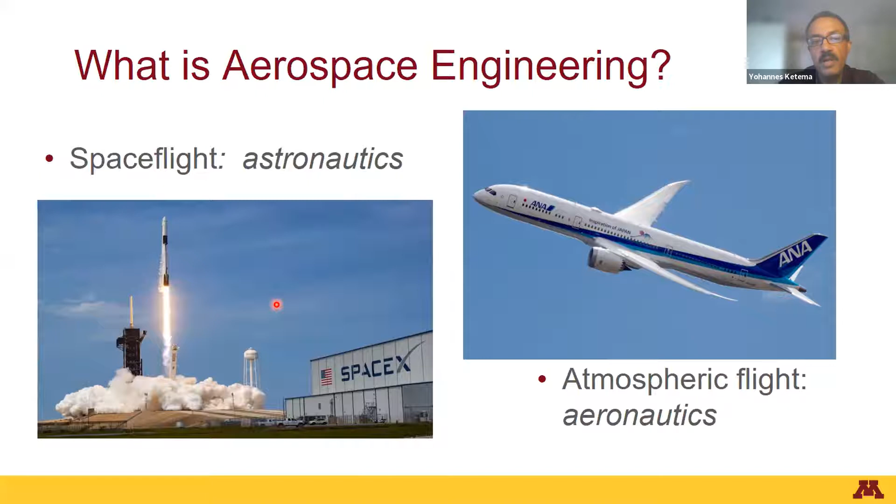In order to be able to work in this area, there are 3 major topics or sets of courses that you would take within the major. I'll talk a bit more about each of these. First we have fluid mechanics or aerodynamics, which is about the flow of fluids around bodies. Then there's structures and materials, because you need to learn about what materials to use in building your airplane or spacecraft. And then there's system dynamics, which is generally about how to control the motion of bodies, possibly airplanes or spacecraft again.

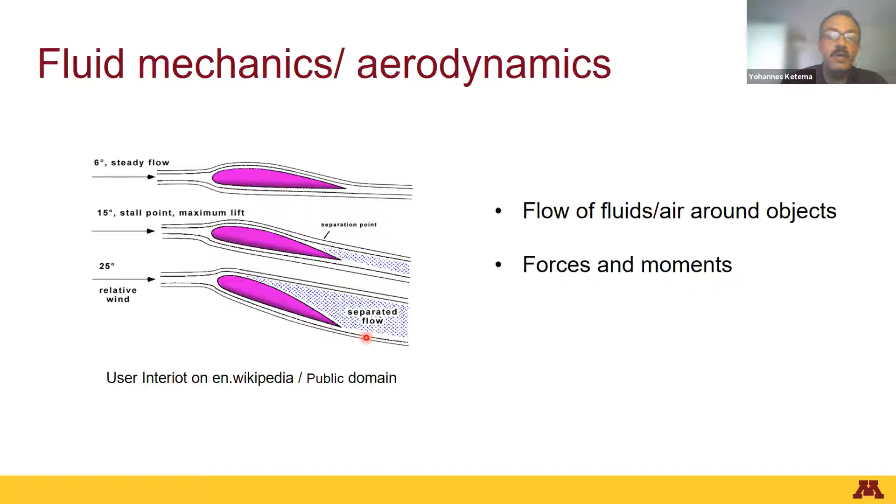Talking about fluid mechanics, aerodynamics is a part or a special case of fluid mechanics. It's about understanding the effect of the flow of air around bodies, typically your airplane, and what types of forces are generated when the air is flowing around the body, or in real life, when the airplane is flowing or moving through the air.

As you may have already seen, the flow of air around a specially shaped body called an airfoil, which is typically the cross-section of an airplane wing, will generate several forces. There's a lift force that is lifting the airplane up. There's drag, which is resisting the motion of the airplane. And there's a moment that tends to turn the body in the counterclockwise direction, the way we're looking at it. It's important to understand all of these, and this is the main goal in studying fluid mechanics and aerodynamics in the context of aerospace engineering.

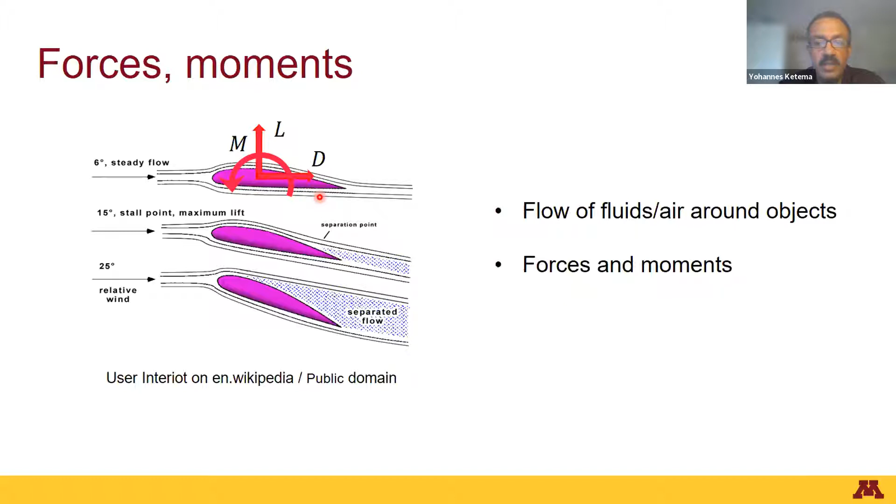There are also other extensions of aerodynamics, such as propulsion, where in addition to just the flow of air, there's also other things going on, such as combustion of the fuel in the air, and the exhaust flowing through the jet engine, or out of the jet engine, is what causes the force on the airplane in the other direction.

So this would be a jet engine, but of course there are many other types of engines, including rocket engines, that are all important as a means of creating propulsion, which we'll also be studying.

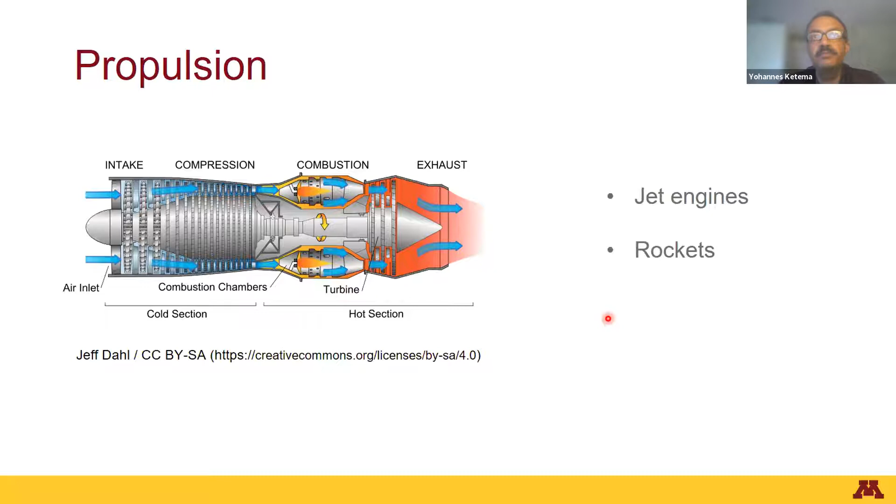The next area that I mentioned is aerospace structures. This is about the materials that we use, but also how to put them together into structures that have the characteristics that we want, for example the right stiffness, or vibrational characteristics, and so on. This is generally called structural analysis, and there's a lot of software used to analyze these types of structures.

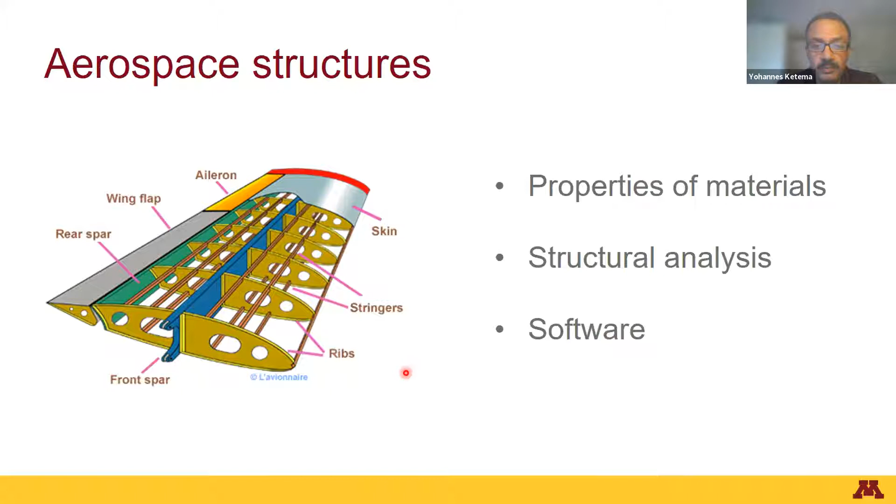Lastly, we have system dynamics generally, but in particular flight dynamics and control when we're talking about atmospheric flight. As you know, the way airplanes are controlled, or the way the motions of airplanes are controlled, is through the use of what are called the control surfaces. So for example, we have the rudder, there's what's called the elevator, and these are control surfaces that can be deflected to cause the right amount of moments that we need to turn the airplane in the right direction.

So a high level view of how all of that might work might look something like this: we have a pilot, say, sending a command to a flight computer, and then the flight computer sending a command to what is called an actuator, a type of motor that is attached to a control surface that is able to deflect that control surface. Because of that deflection, the airplane will move in a certain way, maybe turn in a certain way, and that is picked up by sensors that tell the flight computer how things are going in terms of doing that maneuver. The order that was sent may be adjusted to either continue along that same line or to reduce the deflection and so on.

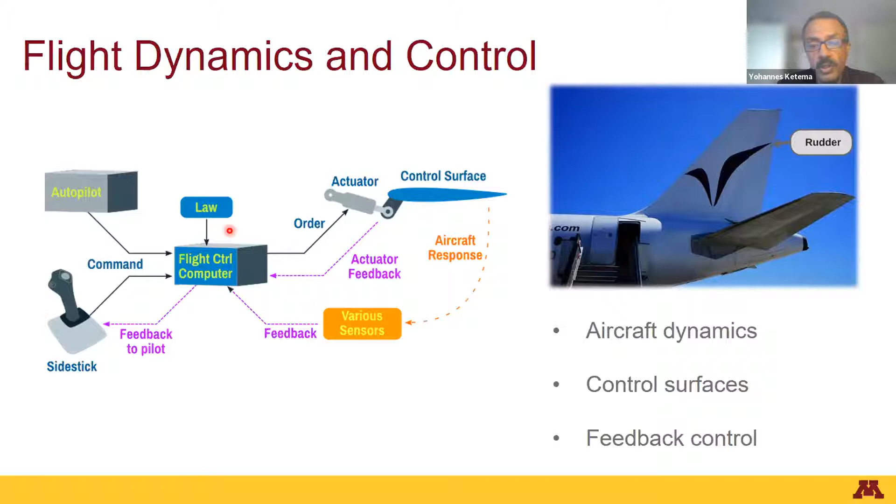Another area that is also related to system dynamics, which is an application of the general area of dynamics, is what is called orbital dynamics. This is very much related to space flight, because when you send a spacecraft into space, there are certain equations of motion, let's say, that need to be satisfied. This is basically based on the types of forces that are acting on the spacecraft. The only force, in addition to the propulsive force that is acting, is the force of gravity. And that leads to certain special types of motion, which you study in orbital mechanics.

So what we're seeing here is, first of all, this blue curve is the orbit of Earth, and the red one here is the orbit of Mars. Here we have these two orbits that are orbits of two asteroids, and the green orbit is a comet. In 2004, there was this mission called Rosetta, where a spacecraft was to go out and meet up with this comet, which is happening right there. This magenta orbit or trajectory shows what the trajectory was that the spacecraft followed to get to the comet.

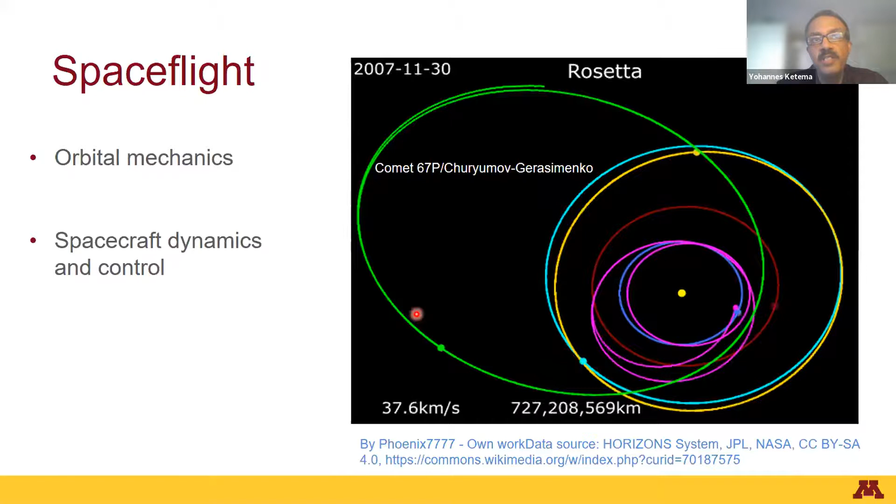So those were some of the areas of courses that you take in aerospace engineering. But maybe a good way of getting a sense of what you will be able to do by the time you graduate as a senior would be to take a look at the aerospace vehicle design course that we have. It's called AEM 4331, and students take this course in the fall of their senior year.

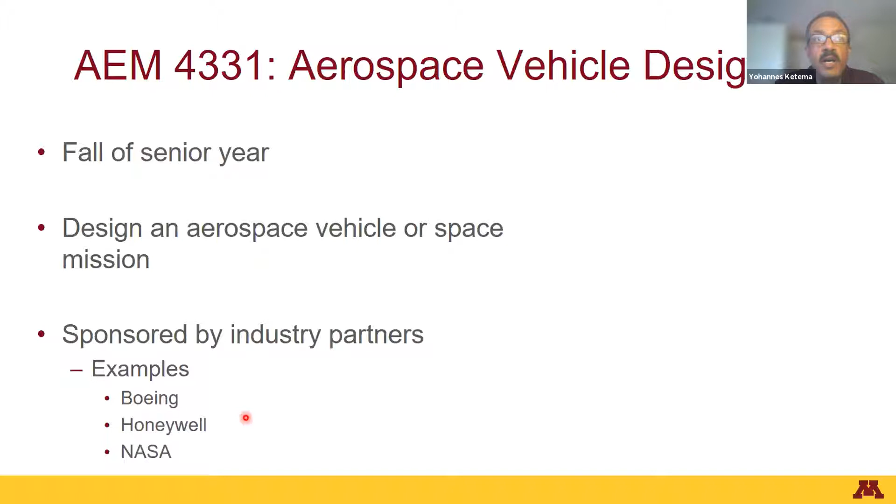The goal of this course is that there are some design projects that you choose from, and then you form teams and work on that design project throughout the semester. The design projects themselves are sponsored by industry partners, so these are very much real life design projects solving current problems that these companies are working on. Examples of past sponsors are Boeing, Honeywell, and NASA. I'll give you a few examples of the types of design projects from the past.

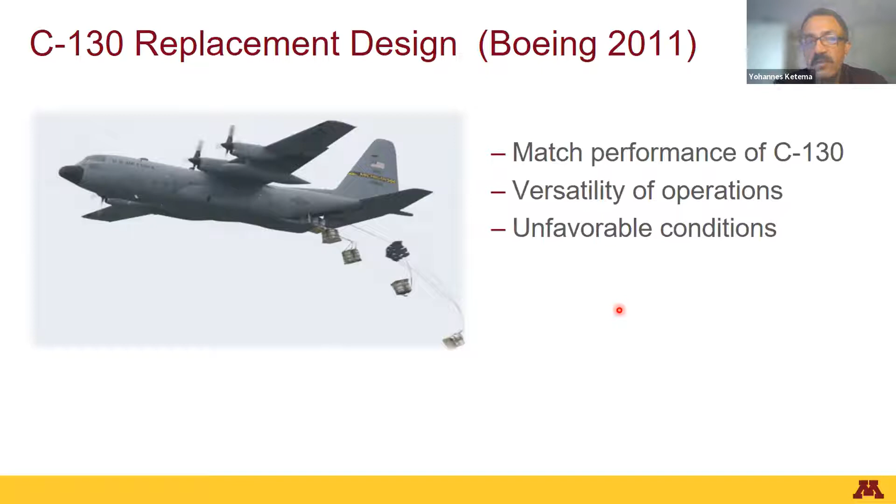In 2011, the design project sponsored by Boeing was to create a replacement design for the C-130, which is an airplane used by the military. This new design needed to match the performance of the C-130 and the versatility of operations, including operating in unfavorable conditions, but with a more modern design that could be more fuel efficient and include whatever other improvements the team could come up with.

Here's a design the team came up with. You can see some differences visible from the outside: the horizontal stabilizer is now on top of the vertical stabilizer, and there's what's called a canard at the front of the airplane. Students were able to look at the airplane, analyze its operation, and come up with a new design that hopefully works better.

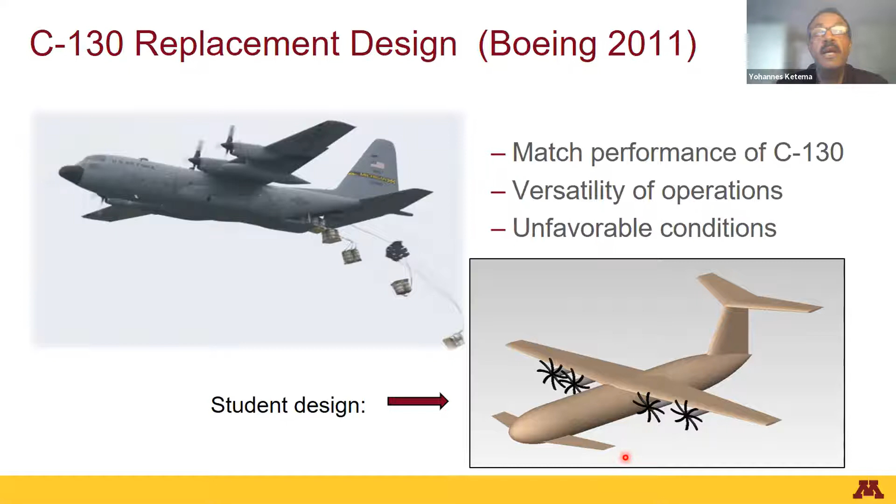Another example was sponsored by Honeywell in 2017, for a project called navigation and surveillance systems for urban air mobility. This was basically a system for air taxis that would take off and land on special heliports, which could be, for example, on top of buildings. Students were asked to consider special sensors, communication systems, and so on, and do simulations of the system in operation.

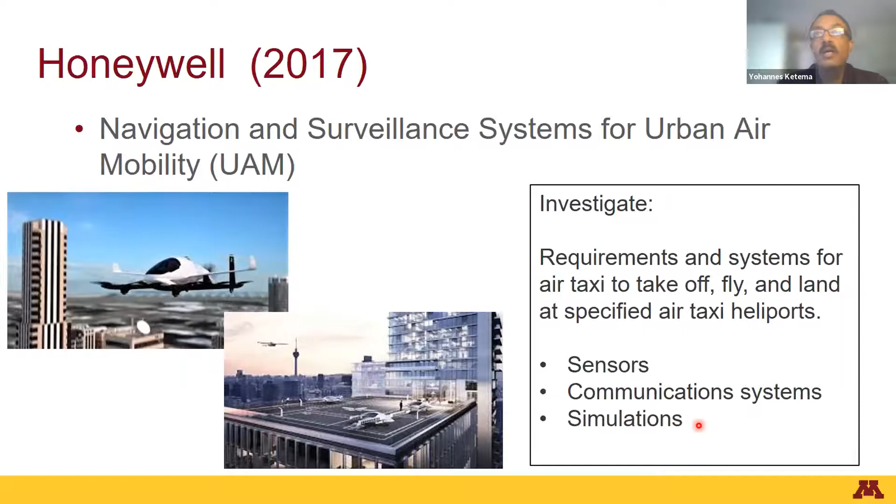Another example is actually a yearly competition called RASC-AL, sponsored by NASA. It stands for Revolutionary Aerospace Systems and Concepts Academic Linkage, and it's a competition for college students that happens every year.

In this case, the goal was to create a reusable vehicle that goes between a cislunar orbiting gateway and the moon. The cislunar orbiting gateway would be a gateway spacecraft flying between the moon and Earth. The idea was that spacecraft would be sent from Earth to the gateway, for example with supplies, but then other spacecraft would take supplies from the gateway to the moon, and then from the moon back to the gateway.

There are certain constraints on the design. It was required that the technology readiness be available by 2028, and that it be consistent with NASA human spacecraft requirements, meaning these spacecraft would be able to carry people. It was also required that there be efficient orbit transfers and deliveries.

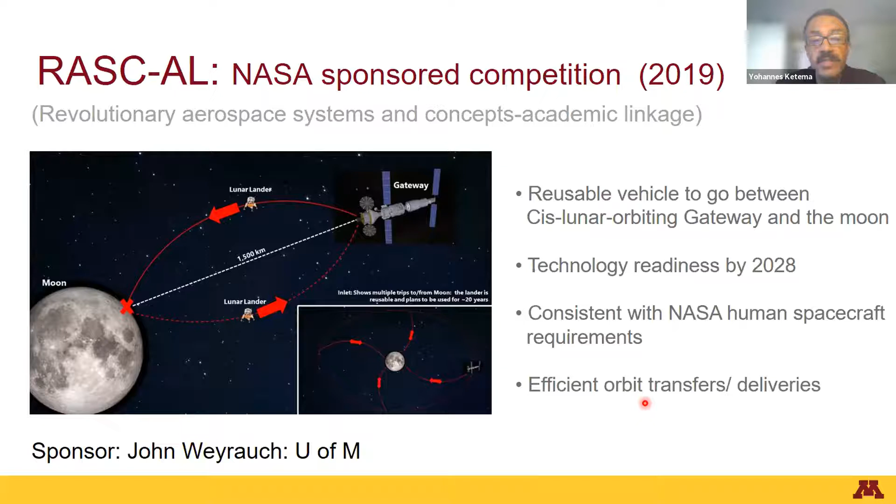So using all the courses you would have taken in the third year, the idea is that you can apply all of that in the designs in the fall of your senior year.

One new thing in the program since 2019 is the co-op program. This allows you to gain work experience while maintaining your full-time student status and going to college. You'd be required to work for 2 semesters, which could include a summer semester. While working, you can take 2 classes, each worth 2 credits, which allows you to get 4 technical elective credits toward your degree.

A total of 9 technical elective credits is required for the degree, so this way you can get 4 of those credits. This is what the ideal schedule would look like if you wanted to do a co-op: in the summer after your junior year, you could work in a co-op, and then also work in the fall of your senior year.

What that means is you'd have to make up for that fall semester, which you would make up in the fall after your senior year. So taking part in the co-op adds 1 semester to your overall 4 years of study. Another option is to take the fall classes, or work in the fall, but then work in the summer after your senior year—though again, you'd have to come back in the fall.

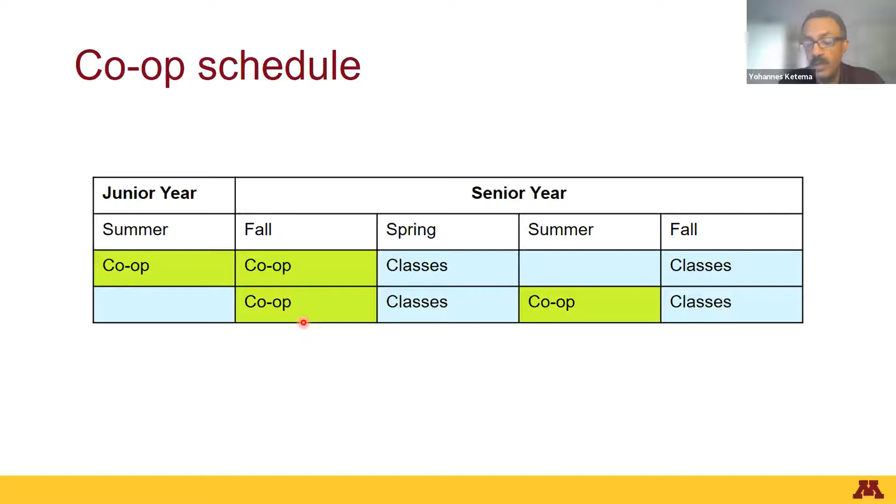But the good thing about the classes in the fall of your senior year is that they're not prerequisites for the classes in the spring of senior year, which is why this would be the ideal schedule. But if you're ahead in your schedule, it is possible to come up with your own schedule for a co-op.

A little bit about job prospects after graduating. This is from an exit survey from 2018-2019, where 86 students graduated. About 90% of the students had a job within 6 months. The median salary was $69,000, and about 7 students went on to graduate school.

Here are some of the companies that typically hire our graduates, like Honeywell, Collins Aerospace, Northrop Grumman, Raytheon, US Navy, and so on. These were kind of typical aerospace engineering companies, but some students go to related areas. One student went to 3M, Seagate, Epic, which is a software company. So it doesn't necessarily mean that you always end up working with airplanes, and that's of course perfectly fine.

Some job titles: systems engineer, test engineer, even electrical engineer, mechanical engineer. Especially compared to mechanical engineering, what you learn in aerospace engineering isn't really very different, except for the fact that it's mostly focused on aircraft and spacecraft.

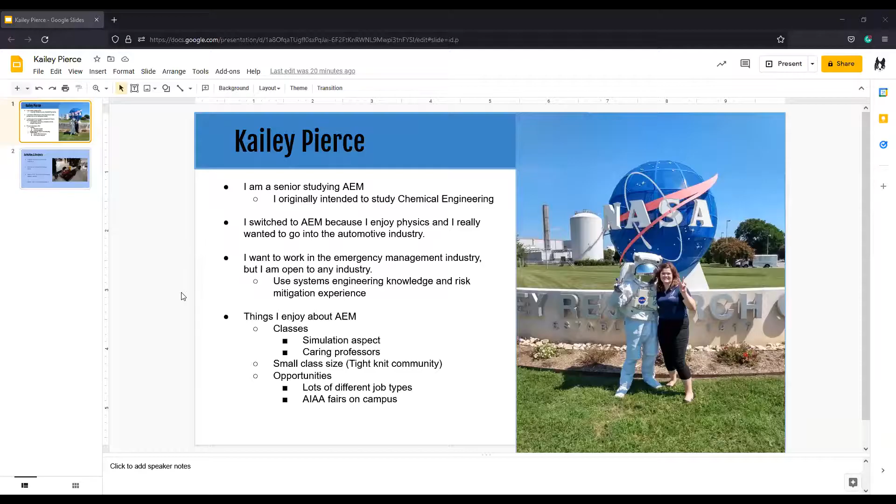All right, can you all see my screen? Can assume yes. Yes.

All right, so my name is Kailey Pierce, and I'm also a senior studying aerospace engineering mechanics. I do have the astrophysics minor as well. I took that class sophomore year. I originally came in intending to study chemical engineering, but I realized very early on that I did not enjoy solving chemistry problems, but I really enjoyed physics. I also, similarly to Anna, really wanted to go into the automotive industry.

Currently, after my past experiences, I've realized that I really do enjoy working in emergency management, but I'm pretty much open to working in any industry.

I think automotive and emergency management really utilize that kind of systems engineering knowledge and risk mitigation experience that we get in aerospace.

Some of the things I really enjoy about our program are the simulation aspects. Almost every class has a MATLAB physics simulation component. Once you take mathematical modeling and simulation, usually your junior year, you'll know how to do some really cool stuff with MATLAB, like real life physics simulations on rockets and planet movement. You'll start using that in your courses to see how beams will fail, to see how things move. It's really cool.

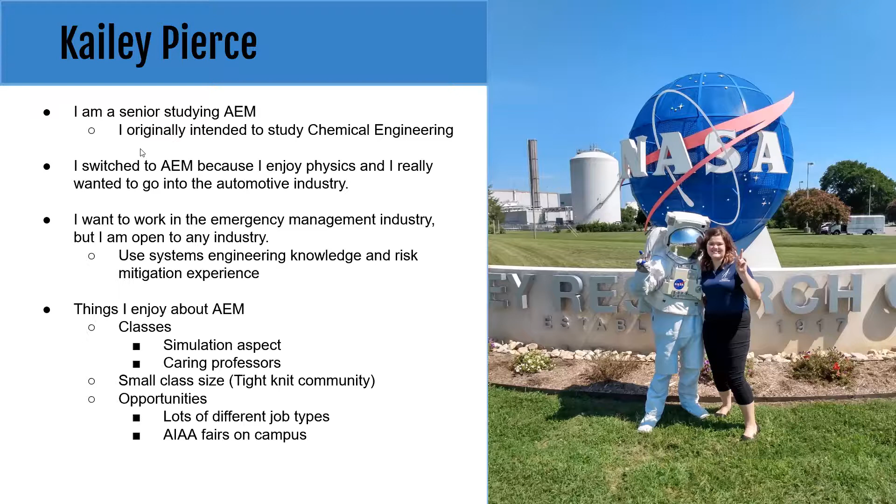There's a lot of different opportunities, a lot of different job types you can take or choose. The AIAA chapter at the university has a career fair every year. If you look at the photo on the right, that's a photo of me with Spacey Casey at NASA Langley Research Center. I interned at NASA Langley Research Center over the summer. It was a very exciting experience.

It's kind of crazy how it happened. My boss, I work at Centennial Hall as a desk assistant, and my boss one day came in and told me she knew someone who worked at NASA. I was like, oh, that's cool. And she said I should connect with her on LinkedIn and she'll have a meeting with me. She was actually part of the CSE mentor program as well.

We had that meeting, it went really well. Then she ended up forwarding me an application for a job at Langley, which is not where she worked, but I was excited and I applied. I didn't think anything of it, but then a month later, they actually got back to me. It was the best experience of my life. I got to go out to Virginia for the summer.

The internship that I did was working with wildfire management. We were working on a UAV system to map wildfires and hotspots to kind of relieve the firefighters doing that job a little bit. I learned so much and I got to meet some really amazing people doing that.

Currently, I am involved in senior design, class-wise, and the senior design project that I chose was the NASA VTOL competition. We're working to make a VTOL, which stands for vertical takeoff and landing, kind of like an Osprey, if you know what that is, to work on wildfires and firefighting.